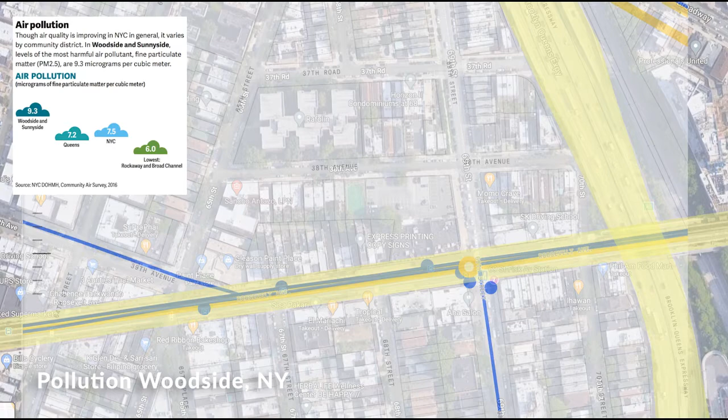It is important to note that most services on the site are multilingual, since more than half of the community is composed of immigrants. Because of the block's close proximity to the BQE and 7 train, the air and noise pollution levels are significantly higher than New York's average. The asthma rate in children who live in Woodside is also higher than New York's average.

For my capstone project, I wanted to focus on what's been affecting my community. East and Southeast Asian families have been targeted and blamed relentlessly for the COVID-19 pandemic within the past year. Hearing violent attacks occur mostly in so-called progressive cities like New York and San Francisco makes it even more upsetting and absurd for me. For my research, I conducted a survey within my own community.

I first began with personal questions about discrimination and other racist encounters, such as how old people were when they first experienced racism. Then I led into what we, as a community, can do in response to the increased anti-Asian attacks, since the majority of survey takers believe our current system will fail us, as we constantly see in the media. Lastly, I addressed the mental health stigma in Asian cultures and the inaccessibility of mental health services in the United States. If mental health services were more affordable, culturally sensitive, and accessible, more survey takers would take the opportunity to use them.

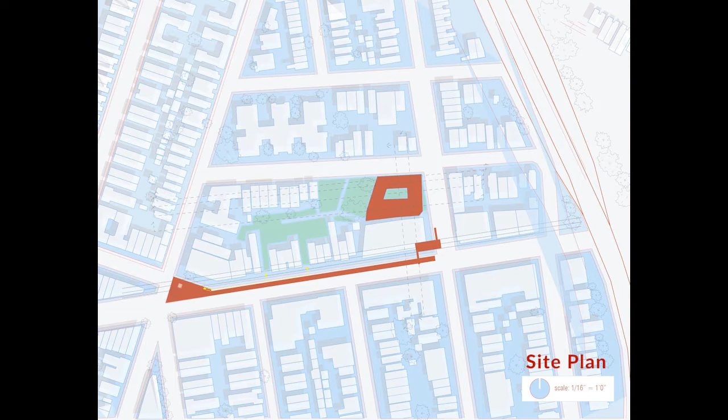So, in response to increased anti-Asian violence due to the pandemic, I propose a safe haven for all Asians, both citizens and immigrants alike. It is a place of resistance where the community can address and discuss the histories and presence of Asians in the United States.

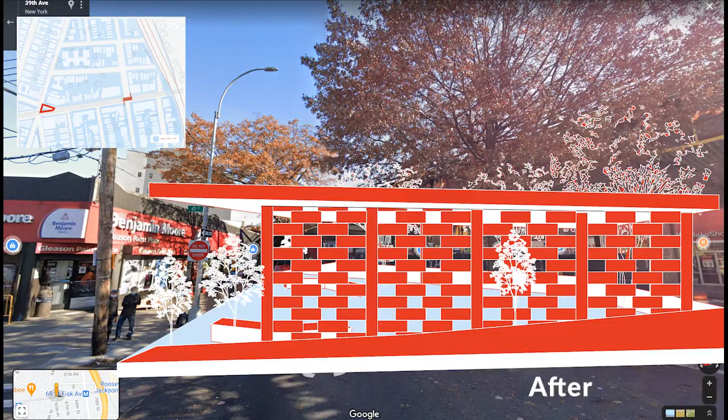A booth offers emergency medical assistance and a place to report hate crimes. It contains a history of anti-Asian violence and oppression, beginning with the first Chinese laborers of the American Transcontinental Railroad and continuing to the present-day violence.

It also expresses our history of resistance with the Asian American movement of the 70s and 80s and present-day Stop Asian Hate demonstrations.

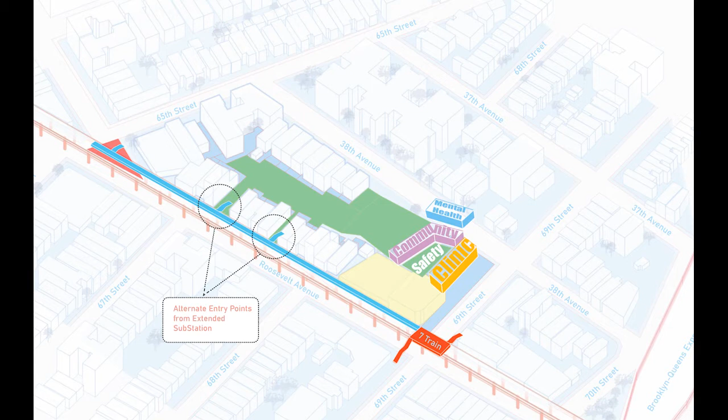Then we shift to propose alternate routes along the underside of the elevated 7 train. It is an extension of the existing subway station that provides new pathways to safety within the block.

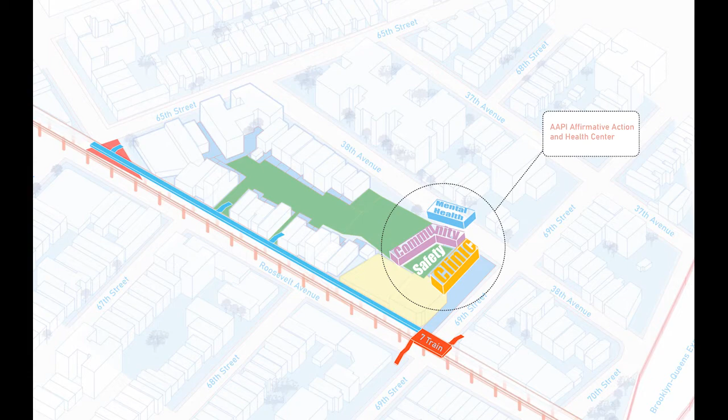And finally, we have our safe haven. Welcome to the Asian American Center for Health and Affirmative Action. This proposal will include mental and clinical health services, environmental services, cultural events, and safety and accessibility.

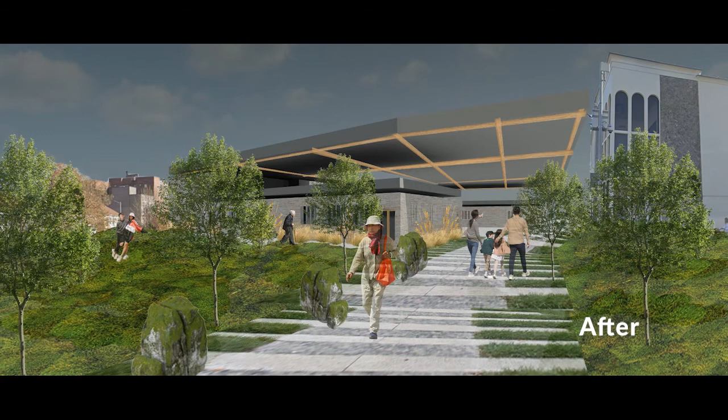The center emphasizes the importance of accessibility and unity. On the first floor, we have the self-defense gym on the left side, the auditorium and meeting rooms on the top center, and the clinical services on the right.

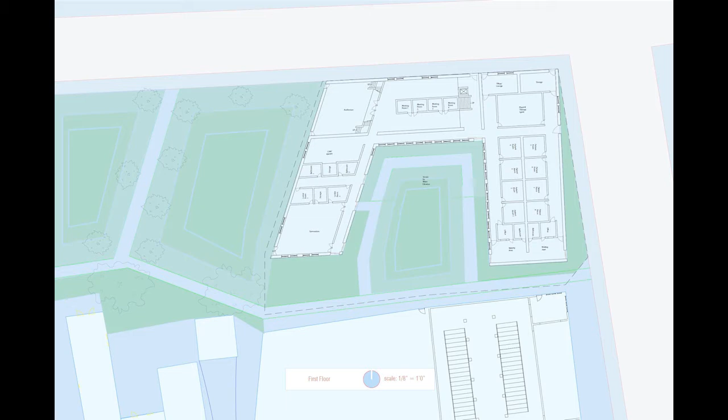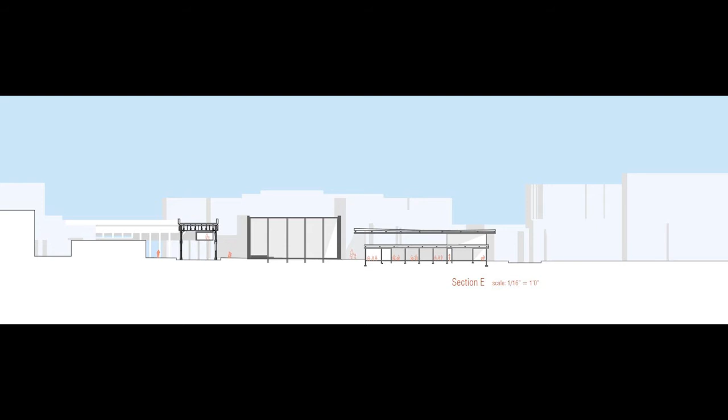The cross sections represent the interaction between the church and the center. The roof creates a canopy over the pathway and decreases closeness to the church as we move west.

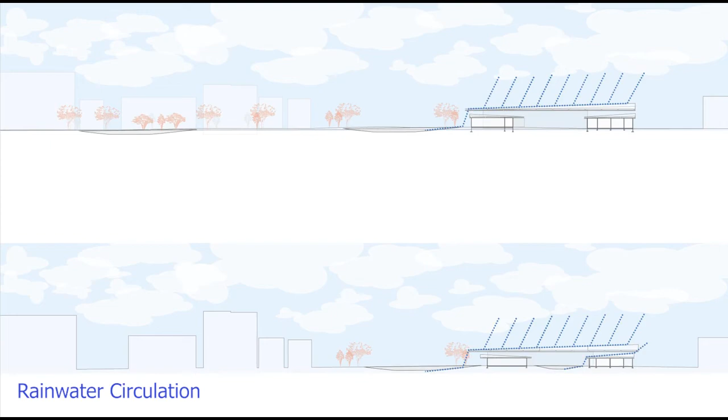Wind flows above and through the roofs. Rainwater slides down the sloped roof into the 2 moss garden pockets, where water is absorbed and filtered for the center to use.

There are 3 layers to the gardens. Our bottom layer has large pieces of gravel from the existing parking lot of the church.